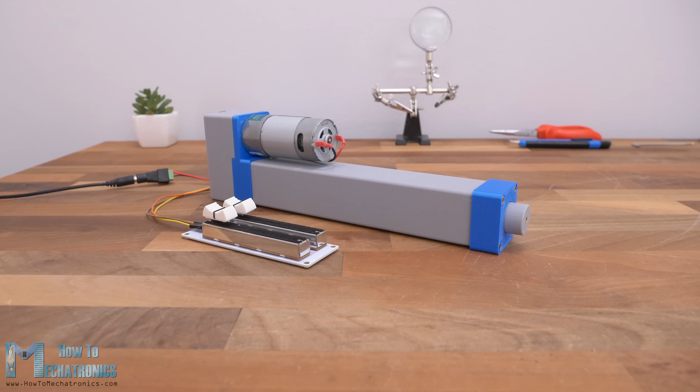Hello, Dan here from howtomechatronics.com, and in this video we will learn how to make a linear servo actuator. Unlike regular linear actuators that move in a particular direction when a voltage is applied, this custom-built linear servo actuator provides precise and repeatable movements that can be easily controlled.

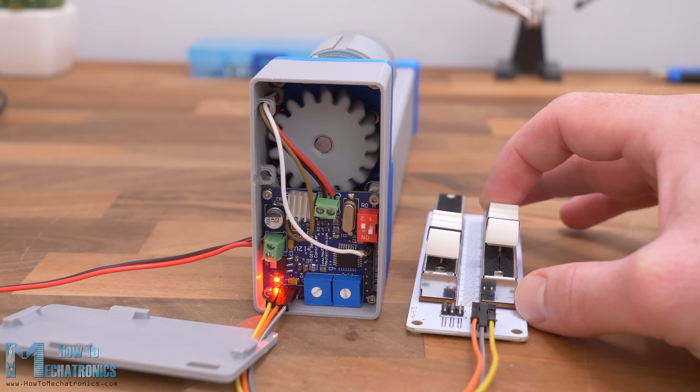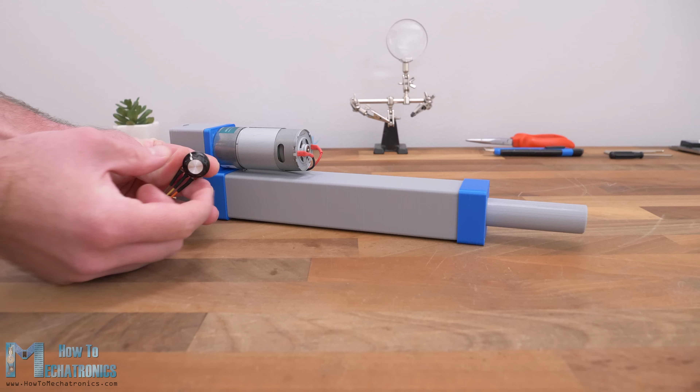It's called a servo actuator because it features a feedback loop system through which we can control the actuator output motion accurately. The input for controlling this linear servo actuator can be either analog or digital. In the case of an analog input, it can be any type of potentiometer like shown here. A linear potentiometer or a common rotary potentiometer, or for example a joystick, which is again a rotary potentiometer, and so on.

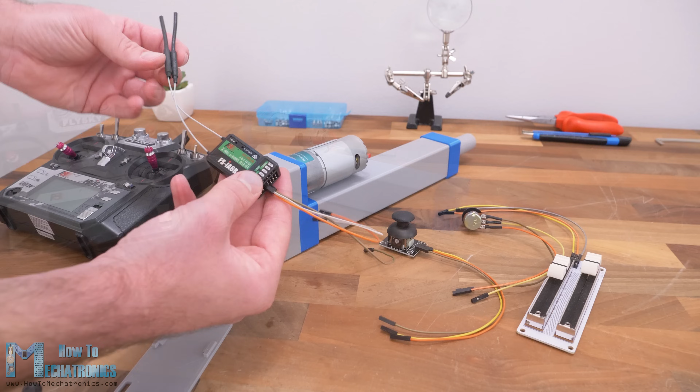In case of a digital input, we can control the actuator with an RC transmitter. Of course, for this setup we also need an RC receiver, which goes as an input to the actuator. For both these analog and digital input modes, we only need 3 wires to make a connection, 2 of which are for powering the input device and the third one is for the input signal.

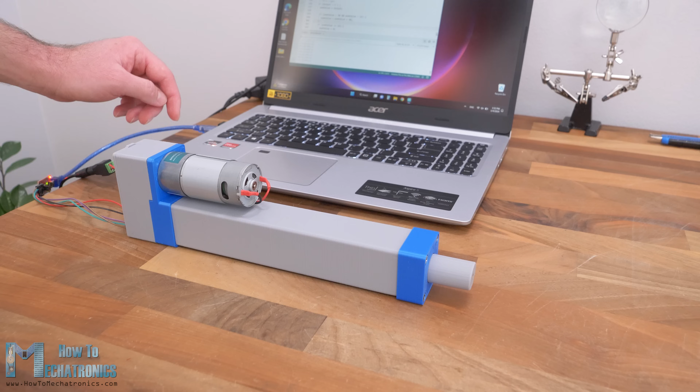A cool feature this custom-built linear servo actuator has is that we can set a custom start and end position for the output rod, as well as adjust the sensitivity or how quickly the actuator will respond to our input. Though my favorite feature is the ability to control this actuator from a PC or a laptop through a serial port communication. We can enter values in millimeters through the Arduino IDE serial monitor and the actuator will move to that position.

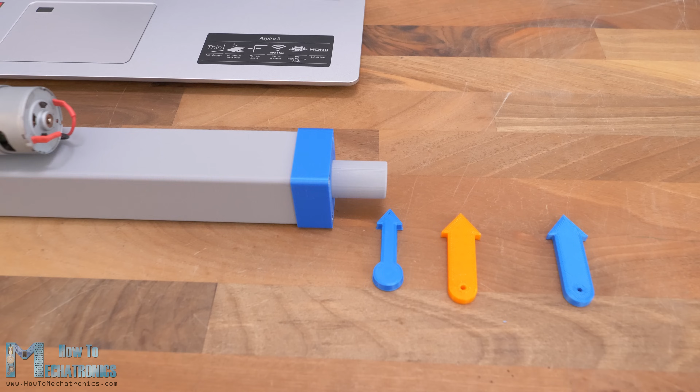What's even cooler, we can make repeatable movements or store the positions by typing save on the serial monitor at each position we want, and then tell the actuator to repeat the movements in a loop by typing run on the serial monitor. Now let me explain everything you need to know about this custom-built linear servo actuator, how it works and how I designed it, so you can also build one on your own.

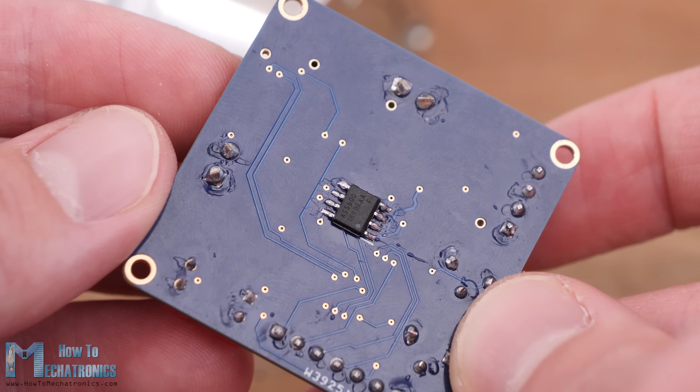So, the closed-loop control system is based on the AS5600 magnetic rotary position sensor and the implemented PID control for driving the DC motor. Actually, I am using the same custom servo motor controller board that I made in my previous video, which includes its own microcontroller and everything else to easily turn any DC motor into a standalone servo motor. You can check that video out for a detailed explanation of how a servo motor and a closed-loop control system works.

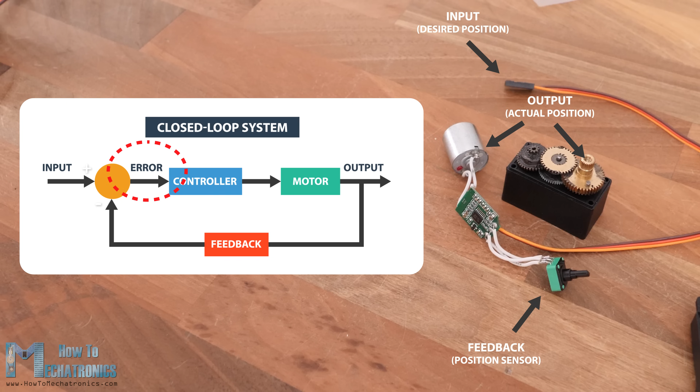Real quick, a servo motor is a closed-loop control system where the input signal or the desired position is compared to the actual position of the motor that we get from the position feedback sensor. The difference that occurs, which is called the error, is then processed in the controller, which commands the motor to move until it reaches that desired position. So this linear servo actuator has the same working principle as a servo motor, but with one additional step of converting the rotational motion of the motor into a linear motion with the help of a lead screw mechanism.

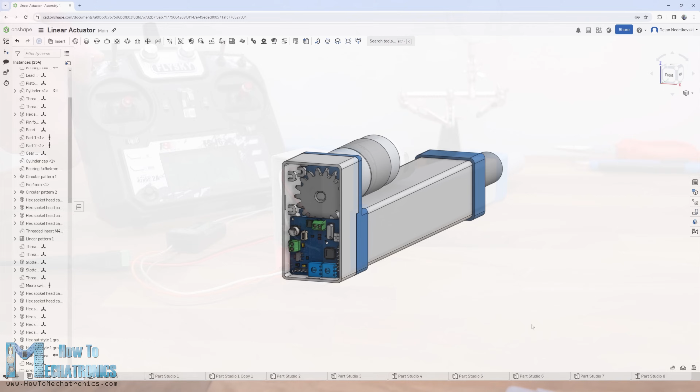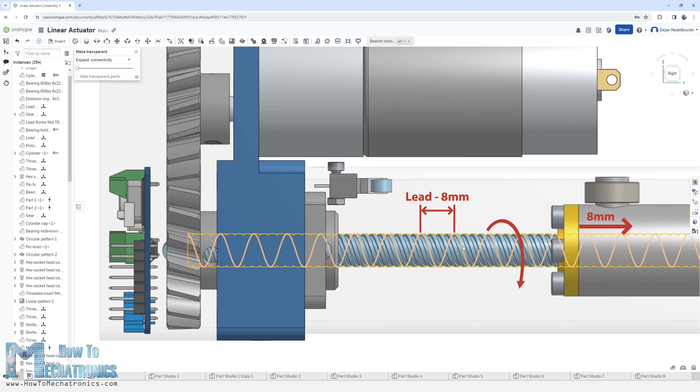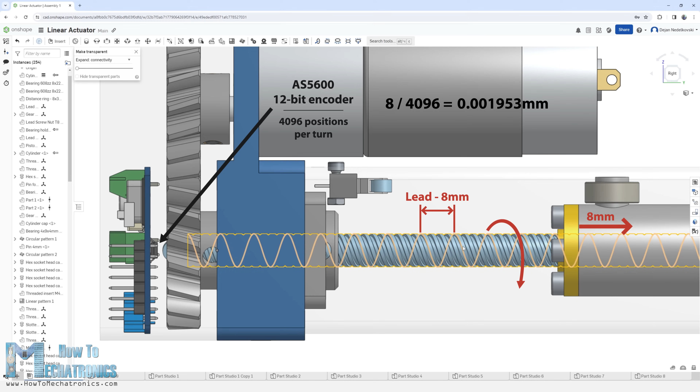Here's the 3D model of this linear servo actuator from where we can see how everything works. The AS5600 magnetic rotary position sensor is located at the backside of the actuator and it keeps track of the rotation of the lead screw. The lead screw that I use has 8mm pitch, which means with each full rotation, the lead screw nut makes 8mm linear motion. The AS5600 is a 12-bit encoder, which means it can output 4096 positions per turn. If we divide 8 by 4096, we get a resolution of 0.001953mm. That's the smallest change in position that the AS5600 encoder can detect.

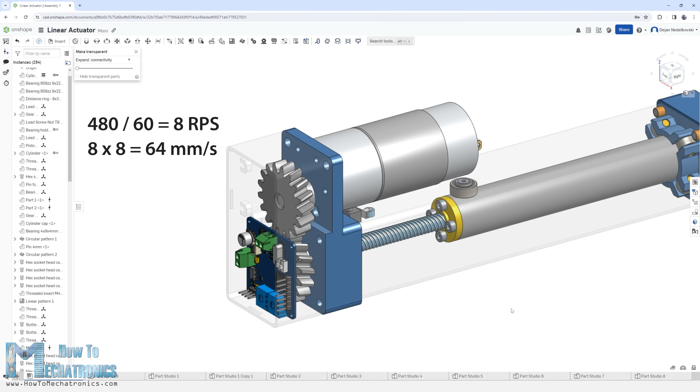The DC motor that I use is a 12 volts motor with included reduction gearbox which outputs 480 RPM. If we divide 480 by 60, we get a value of 8 revolutions per second, and if we multiply that number by 8, because the lead screw has 8mm pitch, we get a linear speed of 64mm per second of the actuator. I found that to be on spot because the maximum travel of this actuator rod is 150mm, so it would take around 2.5 seconds from start to end position at maximum speed, or around 3 seconds if we include the acceleration and deceleration.

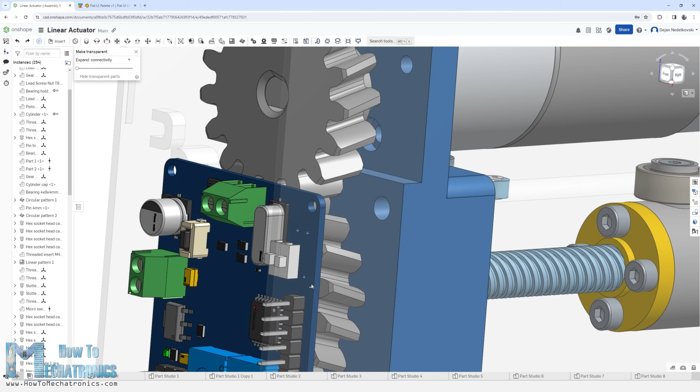Therefore, here I used 1:1 gear set ratio for driving the lead screw. The design of this whole linear actuator is based on the size of the custom-built servo motor controller PCB, and the lead screw and the lead screw nut, of course. The PCB had a dimension of 40 by 40 mm, so that was the minimum size of the cylinder block.

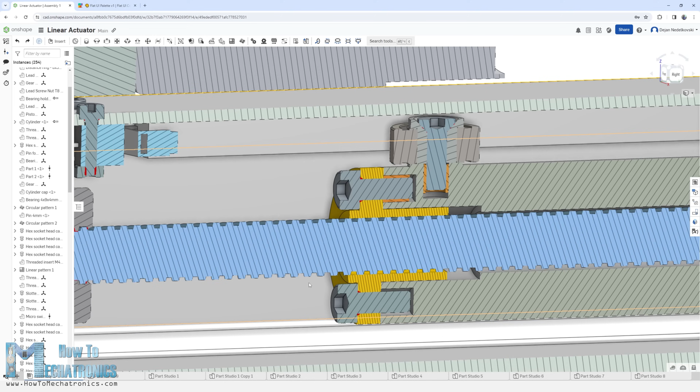The 8 mm lead screw nut had outer dimension of 22 mm, so according to it I designed the rod. The nut and the rod are connected with 4 M3 bolts and threaded inserts. At the top of the rod there is a bearing that slides on the cylinder block, and it's used for guiding the rod and preventing it from rotating. At the output cylinder cap we have 4 small bearings which guide the rod out of the cylinder block.

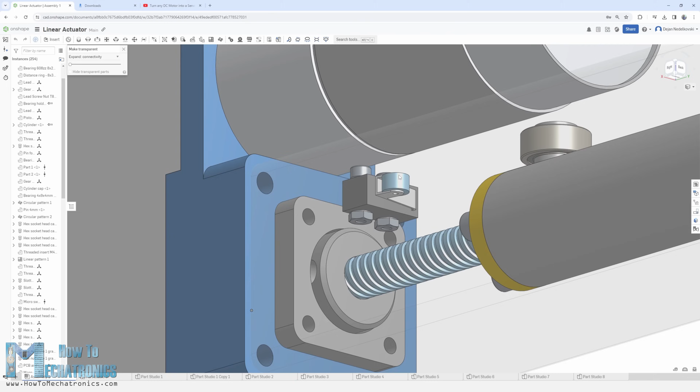Overall, I think the linear actuator came out compact enough considering all the components used. I also managed to fit a micro limit switch inside the cylinder block, which will be used for homing and setting the start position of the actuator.

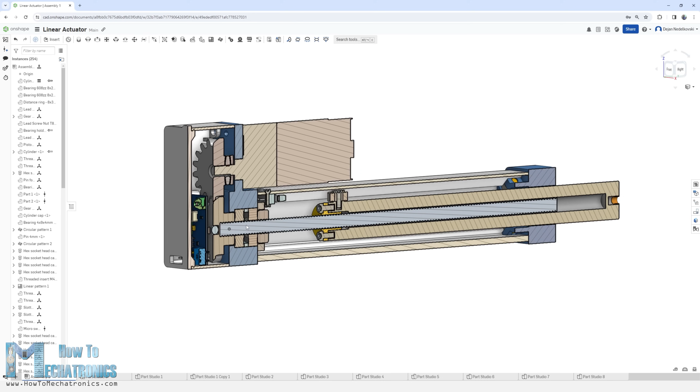One more thing to mention here is that you can easily increase the maximum travel length of this linear actuator by simply increasing the length of the cylinder block and the rod. I chose these dimensions because I wanted all the parts to fit on a 3D printer with smaller print bed of 220 by 220 mm. The biggest part here is the rod, which is 215 mm long.

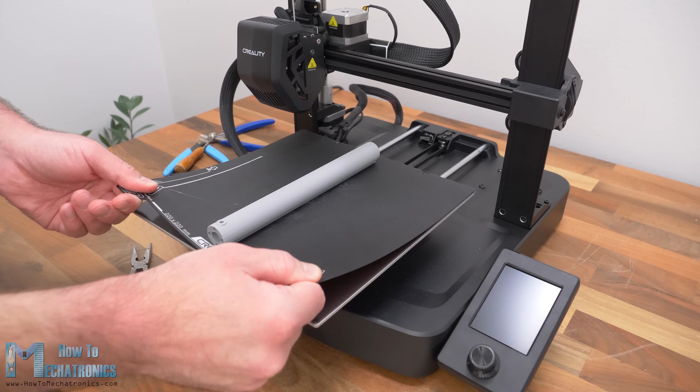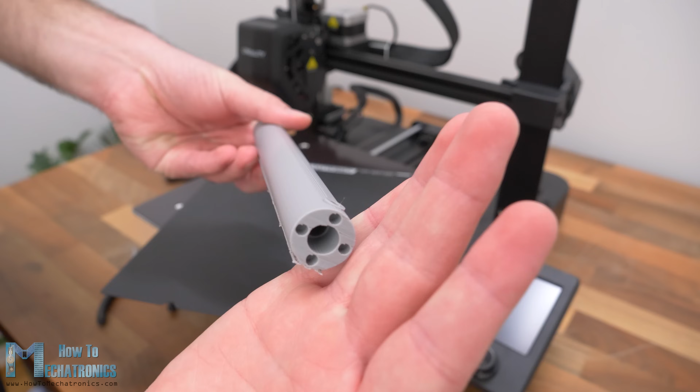My new Creality Ender-3 V3 SE did a great job of printing it in a horizontal orientation along the y-axis. Although we need to do a little bit of sanding, printing the rod in this orientation will contribute to smoother operation and stronger rods. When 3D printing, it's important to use the horizontal expansion feature in your slicing software in order to compensate for the expansion of the filament and get more dimensionally accurate parts. I used a value of -0.1 mm, but you should do some test prints to see what values will give you the best results on your 3D printer.

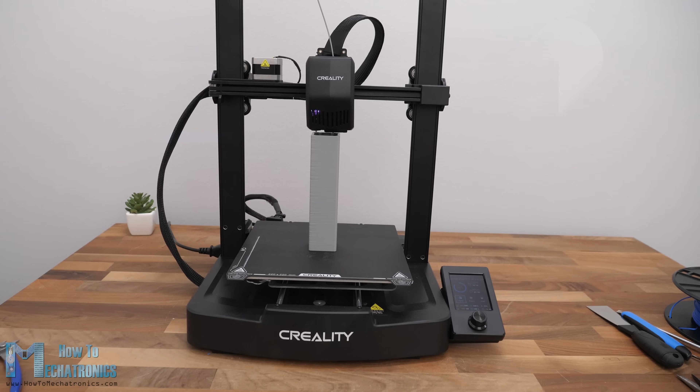I printed the cylinder block along the Z-axis to avoid printing a lot of support material. The Creality Ender-3 V3 SE also did a great job for this print.

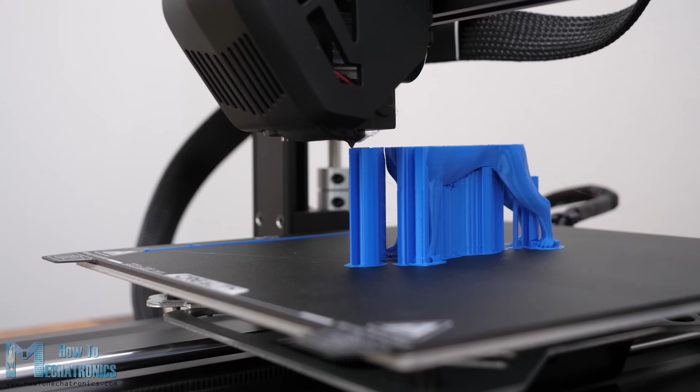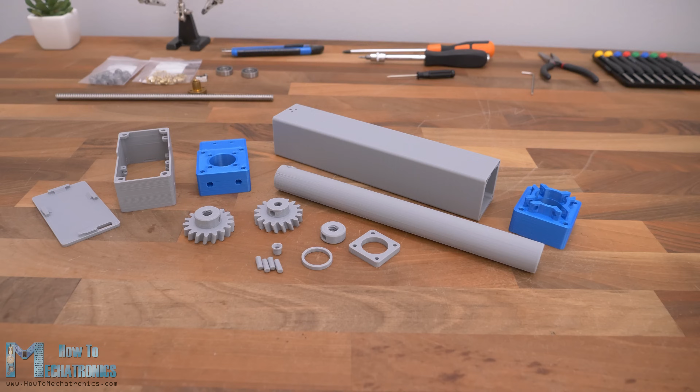Anyway, here are all 3D printed parts, so now we can start with assembling the linear actuator.

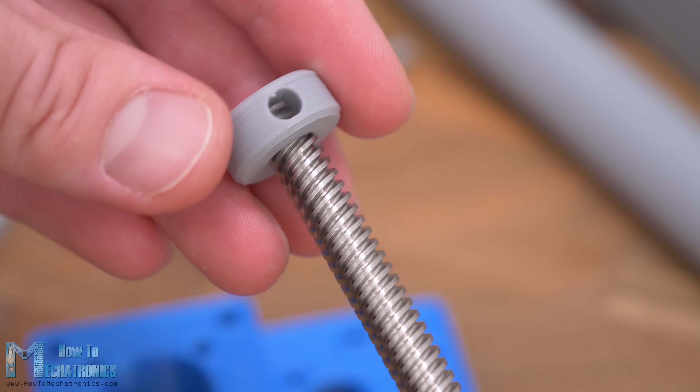First, we need to install the lead screw in place in the cylinder base block. For that purpose, we need to insert this 3D printed nut, which has the same thread as the lead screw. It's a bit hard to screw the nut onto the lead screw as it's a tight fit, but that's what we need here. This nut holds the entire force when the rod is pushing, so the tighter the fit, the more force we'll be able to hold.

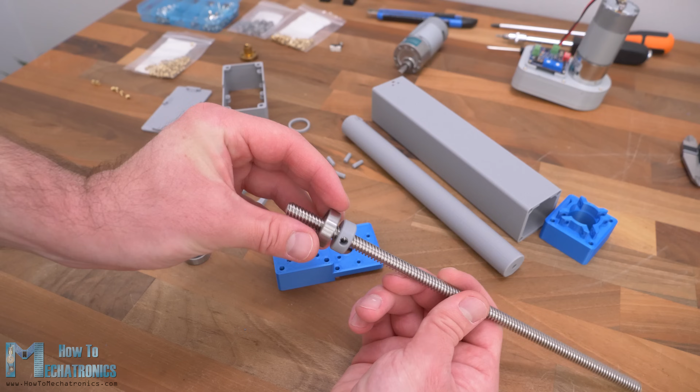In addition to that, the nut also has a hole for inserting a threaded insert for securing it to the shaft with a grub screw. The lead screw is held in place in the cylinder base block with the help of two bearings with 22 mm outer diameter. At the back side goes the gear that drives the lead screw.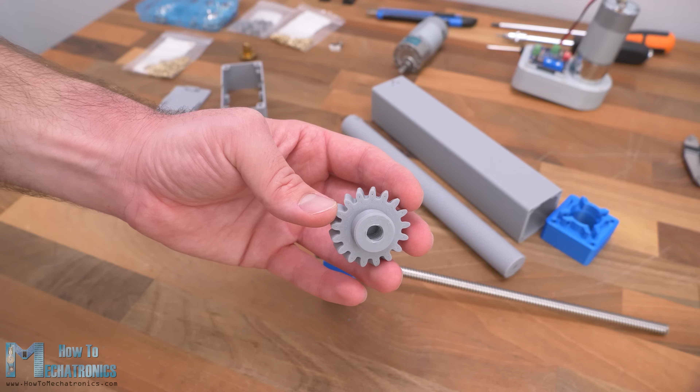This gear also has a matching thread and two holes for threaded inserts for securing it to the lead screw with grub screws. This connection is also critical as it transfers the entire torque of the motor to the lead screw, so it must not slip. To make this sub-assembly, first we need to install the threaded inserts in place on the gear and the nut, as well as some on the cylinder block.

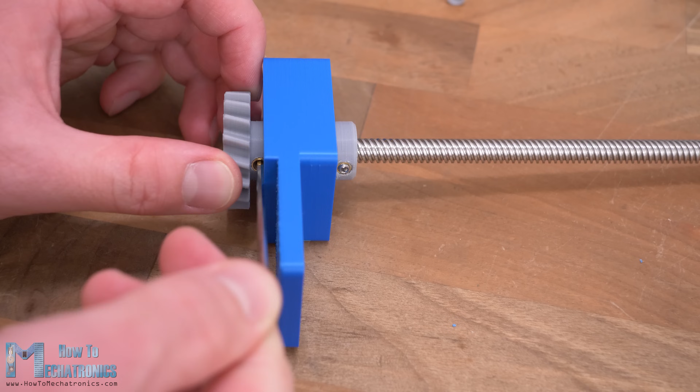We screw the gear and the nut in the opposite direction, but not too tight as this adds axial forces to the bearings. Then, using some grub screws, we can secure the nut and the gear to the lead screw. Once secured, we can notice that the lead screw is not yet fixed in place. We need to add this plate to the cylinder block, which will ensure that the bearings will stay in place in the cylinder block. This completes this sub-assembly. The lead screw now stands firmly in place while it can freely rotate.

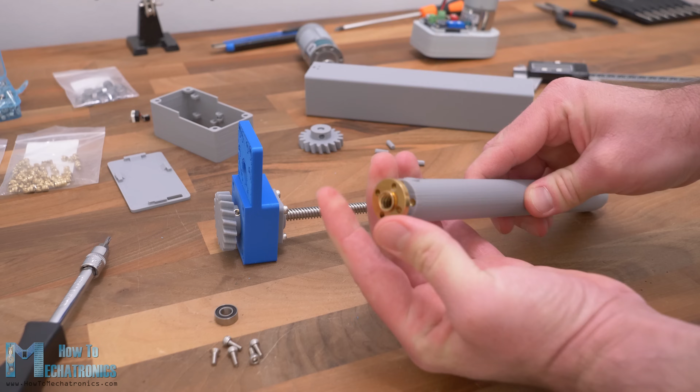Next, we can prepare the rod. The rod is hollow throughout its entire length to accommodate the lead screw. For connecting the lead screw nut and the rod, first we need to install some threaded inserts. At the top side of the rod, we need to install the guide bearing with 13 mm outer and 6 mm inner diameter. We place the bearing on a 3D printed 6 mm hollow shaft and secure it to the rod with an M3 countersunk screw with 10 mm length. The rod is now ready and we can see how it will slide in the guide rails of the cylinder.

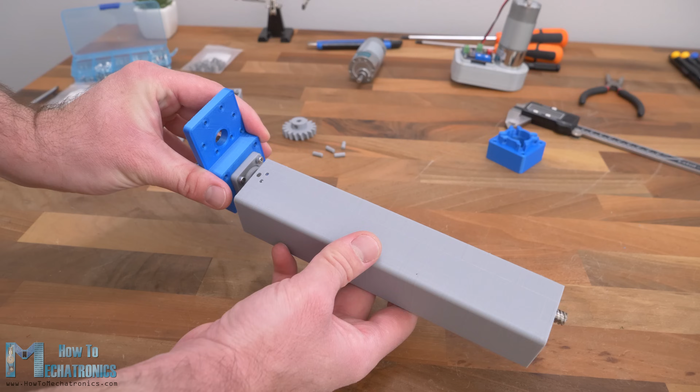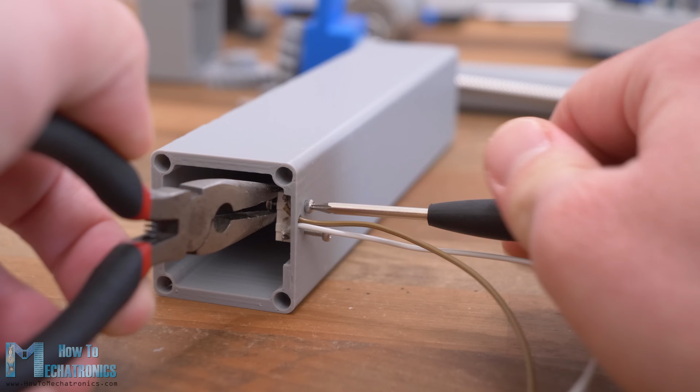Next, we need to attach the cylinder to the cylinder base block. Before we do that though, we should install the micro limit switch in place. First, we need to solder the wires to it at the normally closed connection. The wires should be around 15 cm long. The wires are passed through a hole at the top of the cylinder, and then we can secure the micro limit switch to the cylinder with the help of two M2 bolts with 8 mm length.

You will need specifically this micro limit switch in order for the guide bearing to trigger it just at the right time without hitting something else. If you can't find the exact limit switch model, of course you can modify the holes and the mechanism. You can find a complete list of all components needed for this project on the website article.

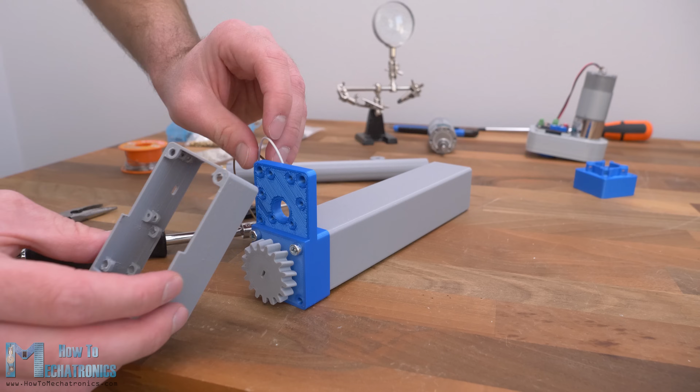In order to attach the cylinder to the base block, we need to install some threaded inserts here. Then we can secure it in place using two M4 bolts with 25 mm length. We should insert just the upper two bolts at this time. The lower two will go a bit later when installing the gearbox and PCB cover, because the same holes are used for securing the cover.

Next, we can screw the rod into the lead screw. The guide bearing should go in between the guide rails of the cylinder. By rotating the gear on the back side, the rod will move backward, all the way until it reaches the micro limit switch. Then we can attach the cylinder cap in place. The cylinder cap will accommodate 4 small bearings with 8 mm outer diameter. The shafts for these bearings can be 3D printed.

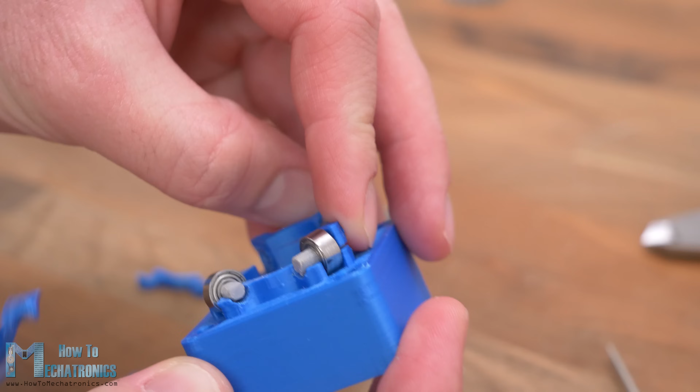However, we should be careful when inserting them in place, as the part where these shafts go is quite small and it might easily break. It happened a few times to me, so make sure they are an easy fit. These bearings will support and guide the rod for smoother operation. The cylinder cap is secured in place with 4 M4 bolts.

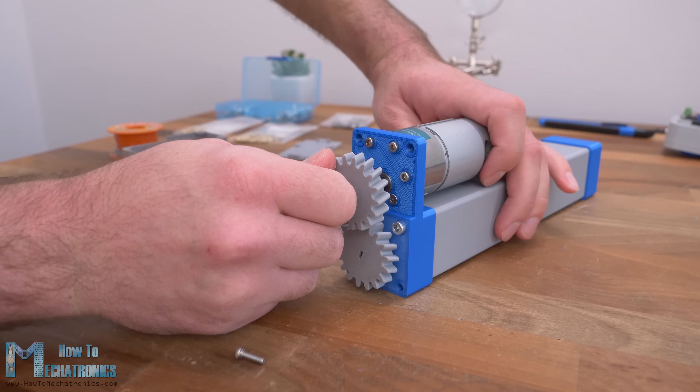Okay, so next we can insert the DC motor in place. We secure the DC motor with 6 M3 bolts. Then we can install the gear onto the motor shaft. For securing the gear in place, we use 2 threaded inserts and grub screws.

Once the gears are properly paired, we can move on with attaching the gears and PCB cover at the back side of the linear actuator. For that purpose, first we need to install a few more threaded inserts into the cylinder base block. Then we can connect the wires to the DC motor. In my case, I directly solder them to the motor. The length of the wires should be around 20 centimeters.

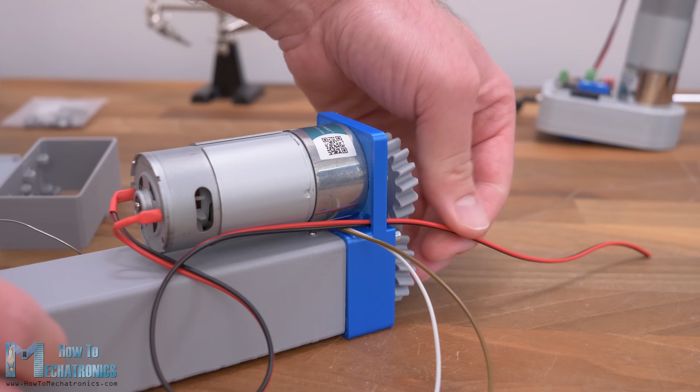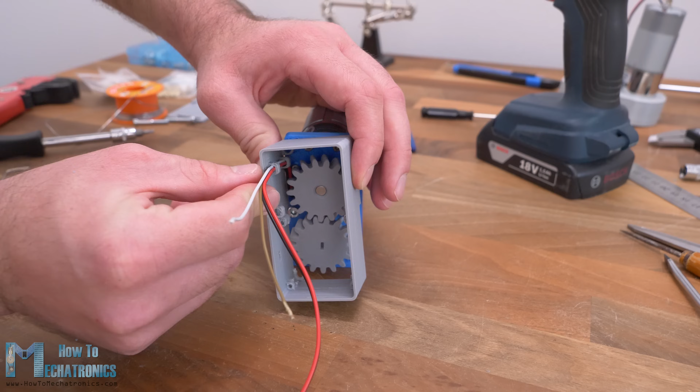There is a hole in the cylinder base block through which we should pass the wires of both the DC motor and the limit switch. Then we should also pass them through two holders on the cover, which will make sure they stay away from the gear. At this point we can secure the cover to the base block.

For that purpose, first we need to insert the two M4 bolts at the bottom side, but not all the way in. We should leave around 2 or 3 millimeters, so that we can place the cover holder in between, and then fasten these bolts together with the cover.

This whole operation is a bit messy, but it had to be like that because I wanted the cover to be as small as possible and a single print, and the PCB holders were also blocking the way of the bolts. Anyway, once we are done with the cover, we can install the custom servo motor controller board in place. Like I said, it's the same controller from my previous video where I showed you how you can turn any DC motor into a servo motor.

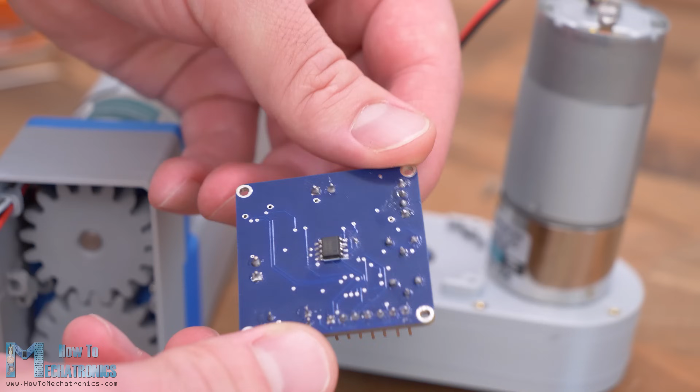The main component here is the AS5600 magnetic rotary position encoder, which keeps track of the angular position of the magnet attached at the output shaft. In this case, we will attach the magnet to the output gear on the lead screw. The magnet gets perfectly aligned with the AS5600 sensor when the PCB goes in place. For securing the PCB, first we need to insert M2 nuts in the holder's slots and then tighten the PCB with 4 M2 bolts.

What's left to do now is to connect the wires in place. The DC motor wires go to the motor terminal block and the polarity should be checked additionally to match with the controller program. Actually, before connecting the motor to the PCB, we can apply some voltage to it to check whether the lead screw mechanism works properly.

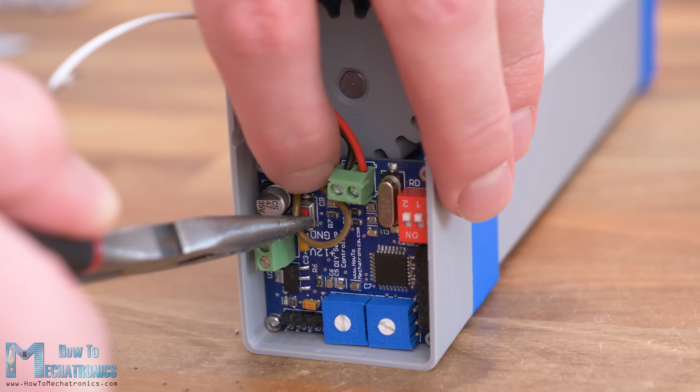As for the limit switch wires, as I don't have dedicated pins for this purpose on the PCB, I soldered the ground wire to the ground pad on the electrolytic capacitor and a normally closed connection wire to the clock pin, which is digital pin number 13 on the ATmega328 microcontroller. The terminal block for the power is right next to the side of the cover, so there is a hole through which I connected a 5.5 power connector. I also added a heatsink to the DC motor driver.

Finally, we can put the snap fit lid on the back side and that's it, we are done with this project. Now we can connect any type of potentiometer or an RC receiver to the appropriate input pins and we can control the position of the linear actuator with it. As I already mentioned, in my previous video I explained in detail how this controller works, its circuit schematic and how I made the PCB, so you should check that video out if you want to make this controller.

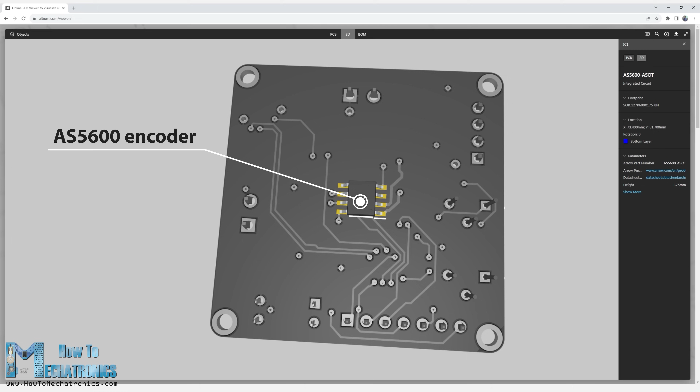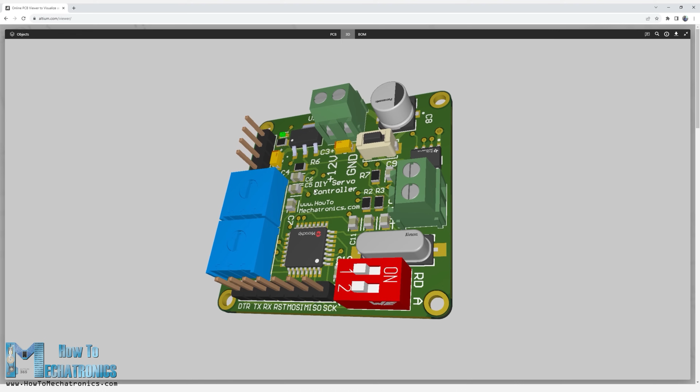Real quick, the main component is the AS5600 magnetic sensor which keeps track of the position of the actuator output. The sensor data goes into the brain of this servo controller board, the ATmega328 microcontroller, which does the math and then tells the DRV8871 DC motor driver how to drive the DC motor. The DRV8871 DC motor driver can handle up to 3.6 amps of peak current.

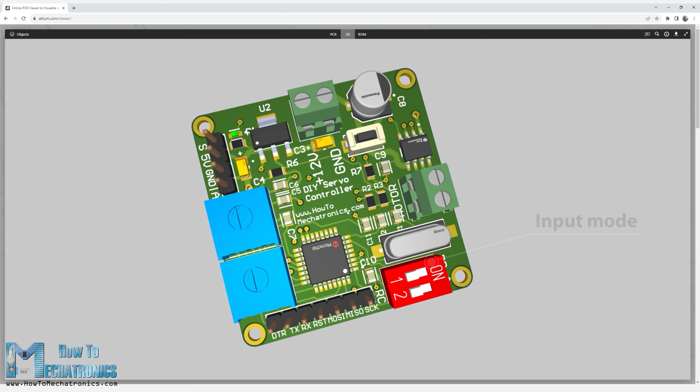For powering the board we can use 12 volts, which is then dropped to 5 volts with an AMS1117 voltage regulator for the ATmega328 and the other 5 volt components. There is a 2-channel DIP switch through which we select the input mode of the actuator, either analog or digital, or via the serial port communication. One of the trimmer potentiometers is used for adjusting the sensitivity of the actuator, and the SMD push button is used for setting the start and end positions.

Anyway, you can also make this linear actuator project even without this custom built servo controller. You can use the AS5600 sensor on a breakout board in combination with an Arduino board for controlling the DC motor.

Okay, let's take a quick look at the Arduino code now, and on the website article you will be able to find more details of how it works as well as download it. So we start the loop by reading the encoder value or the current position of the actuator and convert it into millimeters. Then, if we are in the serial communication mode, we read the incoming data that we enter on the serial monitor. If the input is save, we store the current position of the actuator, or if it's clear, we clear the already stored positions.

If the input is an integer number from 0 to 150, we use that value as a set point. We enter values in millimeters, but for keeping track of the rotating shaft, we are using degrees, so therefore we convert the millimeter values into degree values by multiplying by 45. That's so because for 1 mm linear movement, the lead screw should rotate 45 degrees. In case you have a different pitch on your lead screw, this number should be different.

If we type run, with the help of some while and for loops, the program will run through the stored positions repeatedly. On the other hand, if we are in the potentiometer and RC receiver control mode, we check whether we have analog or digital input. If analog, we read the analog input from the potentiometer and use that value as a set point or desired position for the actuator to go to. Similarly, if the input is digital, we read the incoming data from the RC receiver and use that value as a set point. Then we call the read encoder and run motor custom functions to read the current position of the actuator and execute the PID control.

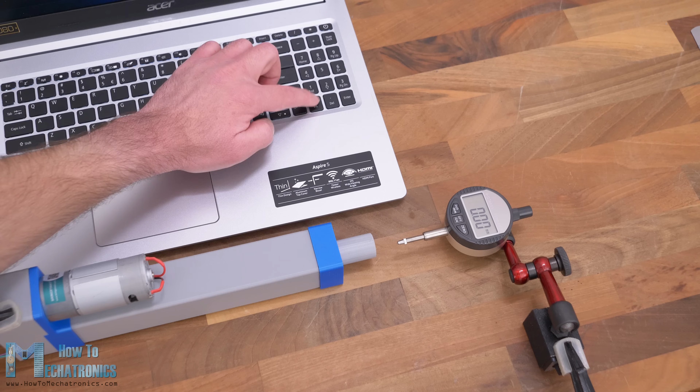Here I am testing how well this actuator performs. When going back and forth, it gets back in place decently. Here I am moving the rod 1 mm at a time. The first movement was like 0.8 mm instead of 1 mm, but the next 4 were close enough to 1 mm. Here I'm making 4 mm movements and they were about 0.15 mm off.

We should notice that the rod has a backlash of around 0.25 mm. This backlash is between the lead screw and the lead screw nut. In addition to that, we have some backlash in the 3D printed gears as well as in the gears of the DC motor itself. If we apply a force to the rod and test the accuracy now, of course we will get even greater error, but this can be improved as well by tweaking the PID controller. However, you will find more details about this on the website article.